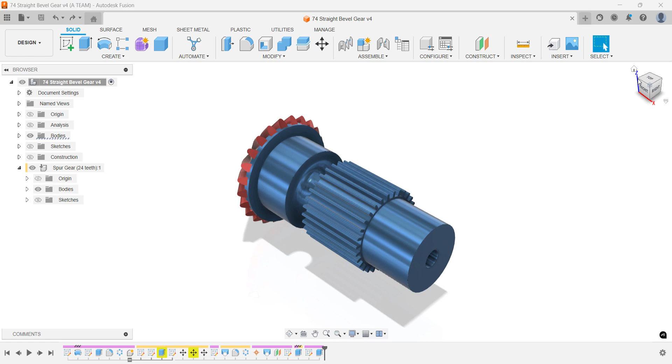In this Fusion tutorial, we'll quickly model a straight bevel gear. Keyboard shortcuts appear in the bottom left corner throughout the tutorial.

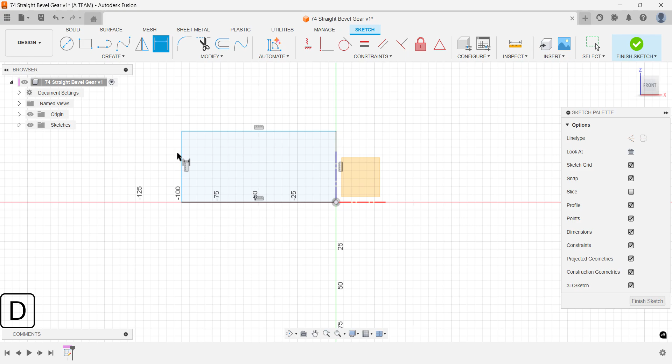Start your sketch on a vertical origin plane for a more intuitive workflow. This 2-point rectangle serves as a rough framework for the detailed sketching that comes next. Sketch loosely within its bounds, you can always refine it with dimensions later. Feel free to use my dimensions or set your own; the ones I'm using are just examples without any specific product requirements in mind when I recorded this.

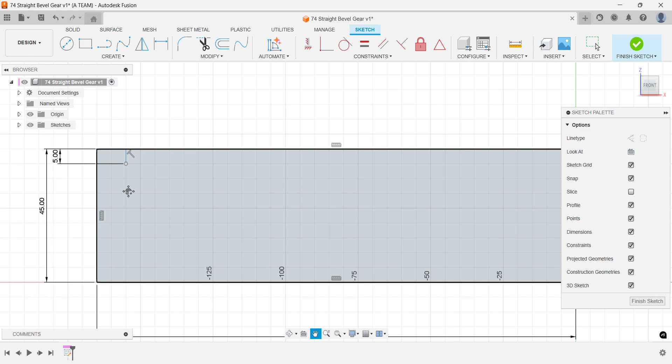The goal here is to create a shape we can revolve around an axis to form the shaft. Feel free to get creative—this sketch I'm showing is just one way to approach it. To keep things quick and simple, I'll start by laying down the sketch lines, then use dimensions to lock everything in place.

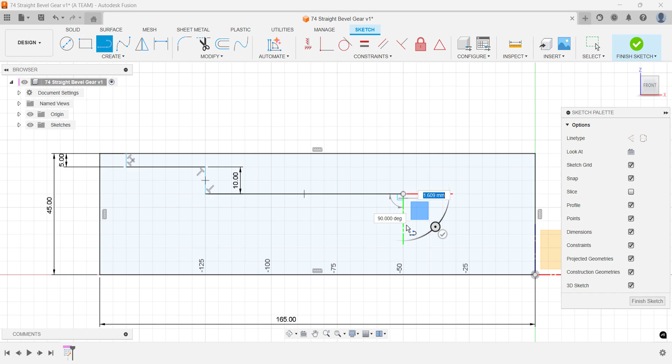Blue lines mean the sketch isn't fully constrained yet, while black lines are fully defined and behave more predictably. It's generally a good habit to fully constrain your sketches, especially later in the design process, but it's not always necessary early on when you're just roughing things out.

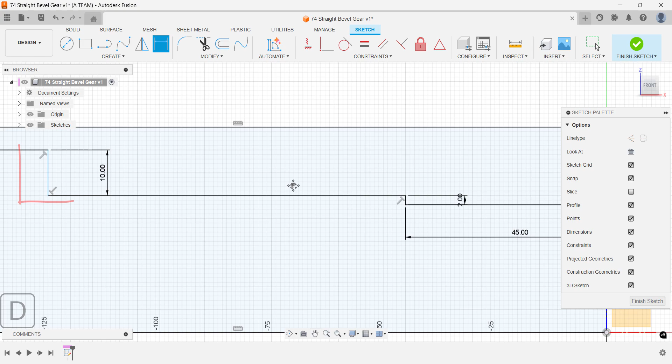Fusion helps you while sketching by automatically adding constraints. You'll see their symbols in the toolbar, and if you hover your mouse over any of them, you'll get a quick explanation of what they do.

To add some variation to the shaft, you can sketch an arc or any similar shape, then use dimensions and the trim tool to clean up any extra geometry.

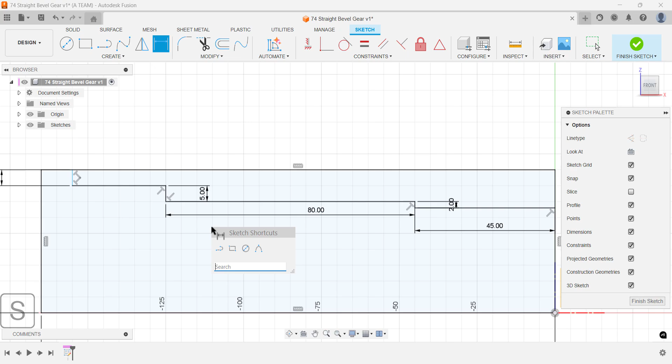Oversketching, iterating, and trimming is often faster than aiming for a perfect sketch right away. It also takes the pressure off. Modeling is about exploring ideas, not nailing it on the first try.

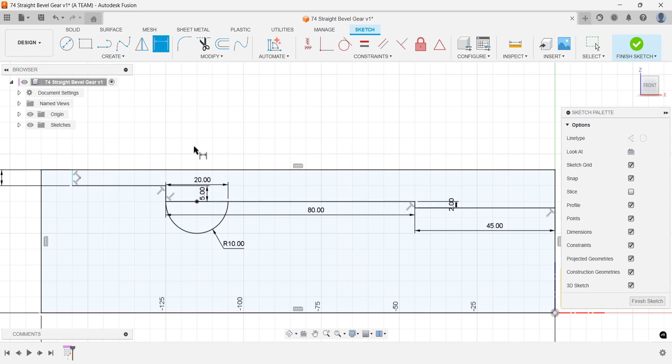Watch what happens to the defined black lines when we trim the sketch to fit the new arc. Some lines turn blue, and Fusion shows a warning in the bottom right corner: constraints were removed during the operation. This isn't a problem, but it's something to keep in mind.

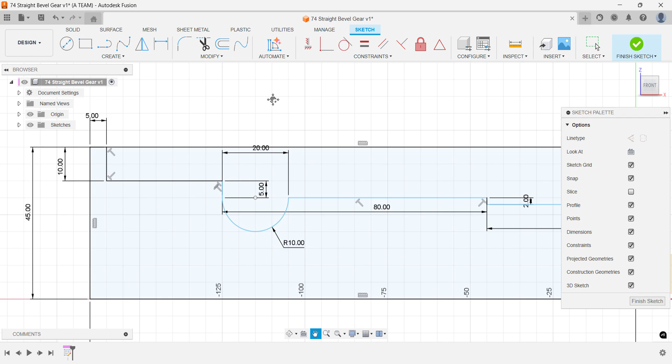Most lines still have dimensions, so it's a good mental exercise to figure out what's missing. In this case, adding a dimension between the end point of the sketch line and the origin fully defines the sketch.

At this point, you've got two closed profiles. You could revolve the lower one right away, but your model will be easier to work with if you first trim away the sketch lines you don't need.

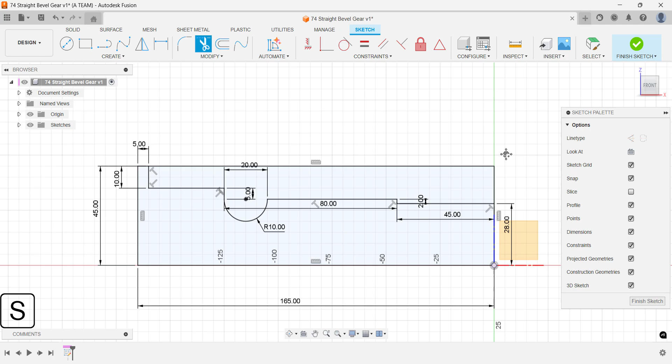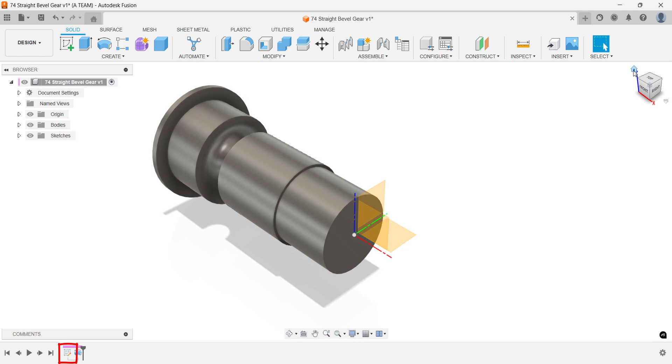Once trimmed, activate the Revolve command. Fusion automatically selects the remaining closed profile, so all you need to do is choose the axis. Click OK to complete the revolve. If you ever need to update the shape, just revisit the sketch through the timeline.

Before we move on to the head, let's add some details to the shaft. For better visibility, you can apply an appearance to the face we're about to sketch on. Think of it like a visual guide—it's not a construction line, but it helps. Use the same appearance you plan to use for the full body later; this blue shading makes it easier to see where you're sketching.

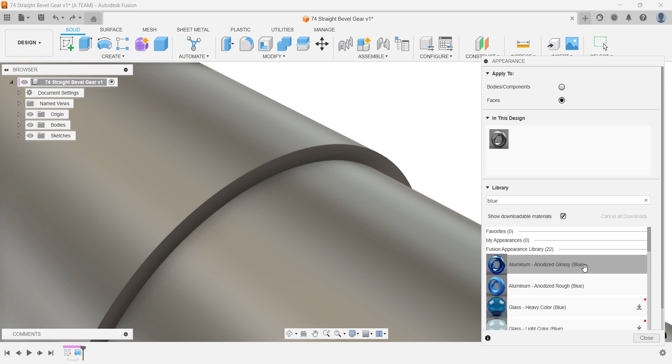Next, we'll project the underlying geometry to this new sketch. That way, if we ever update the original sketch, this new one will update automatically, keeping the design fully linked.

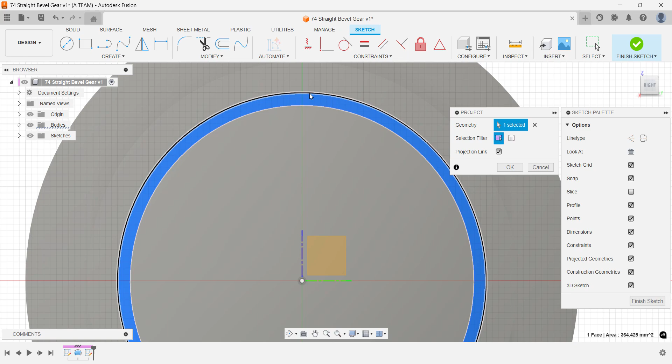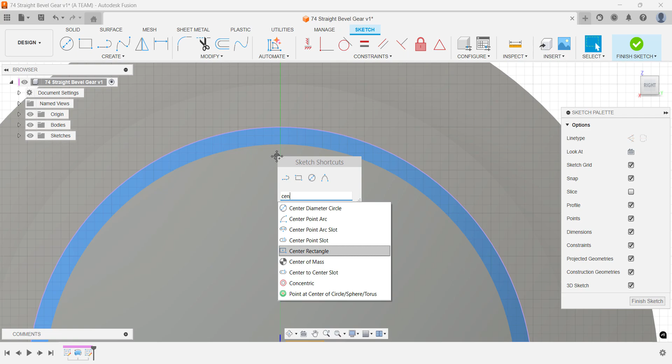There are plenty of ways to approach the detail we're about to create. Once again, I'm using a 3D modeling method where I sketch, trim, add, and remove geometry. The projected circular shapes act as boundaries for the trim operation, and the end of this rectangle blends nicely with the projected circle.

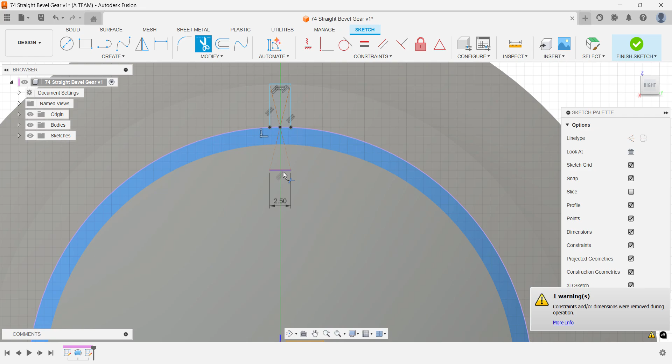Think ahead to the next steps. You'll need to create a circular pattern, and you'll want this feature to behave as a separate body so it doesn't affect the shaft. That's why I'm choosing to extrude it as a new body to the opposite end.

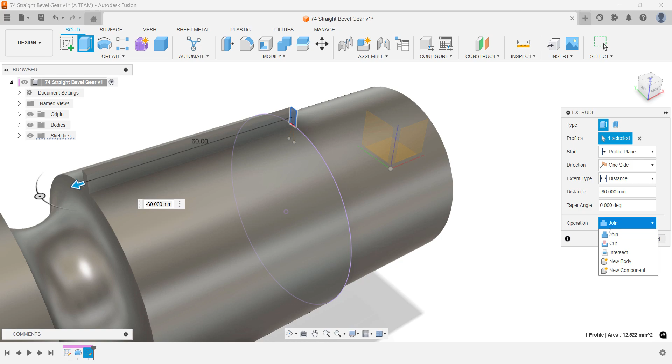And remember, this is just one approach. Others might prefer using commands like Loft or Rib to achieve a similar result.

Add a full round fillet before creating the circular pattern. Since it's parametric, it'll update automatically if the sketch changes. It's also easier to apply now than after the pattern, and any future changes to the pattern quantity will keep the fillet intact.

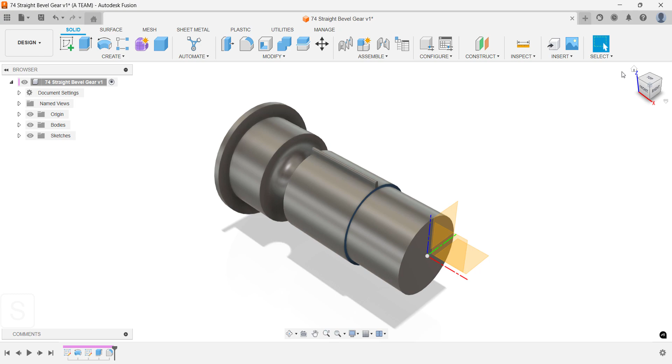The blue highlight confirms this part is an individual body. Keeping the design centered on the origin helps us easily choose an axis for the circular pattern.

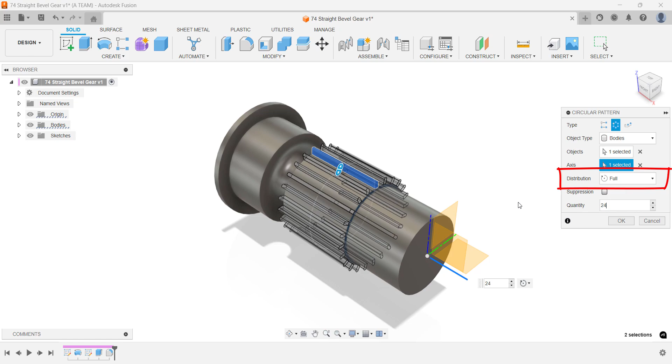Set the distribution to full and choose a quantity that fits your project. I'm using 24 here, but this is just an example, not tailored to any specific product requirements.

Now it's time to create the head. First, I'll measure the diameter—we need to check the size of the sketch we revolved earlier. It's 90 millimeters, so we'll keep that in mind when creating the gear.

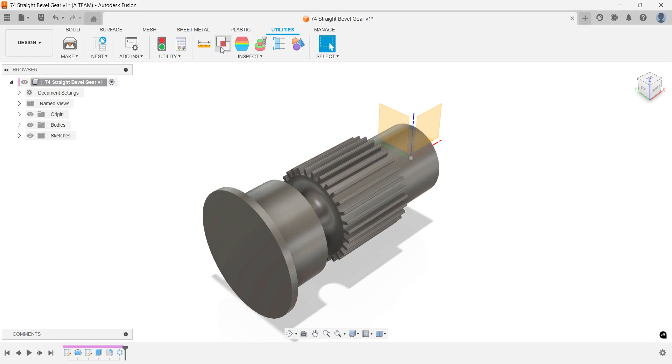Head over to the Utilities tab and open Scripts and Add-ins. Select Spur Gear and click Run. You'll see a helpful picture and a few settings in the menu.

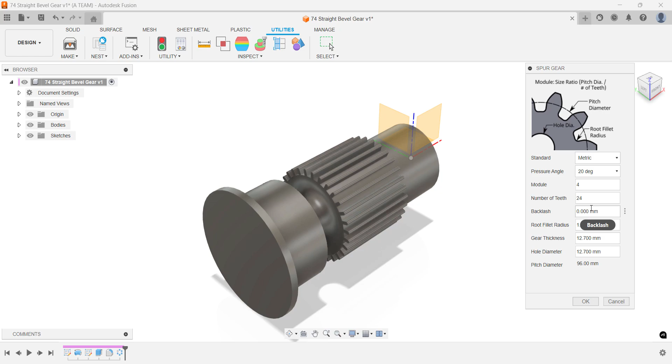Change the module to 4. This updates the pitch diameter to 96 millimeters. For a real project, you'd probably fine-tune these settings more carefully, but this will work for this Fusion tutorial. Hit OK, and the new Spur Gear component will appear centered at the origin and in the project browser.

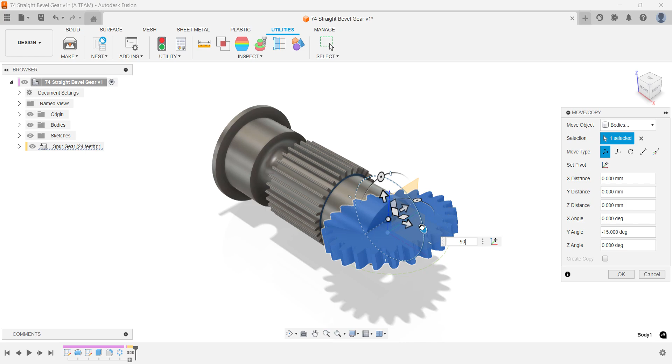Reposition your gear using the Move command. If you followed the first rule of Fusion and placed your design in a new component, you could assemble everything. But we're not doing that here.

Don't use joints here. They are the right tool in many cases, but not in this one. We're about to break the gear into parts and not making an assembly.

Use the point-to-point move instead. It makes it easy to place the gear exactly where it belongs.

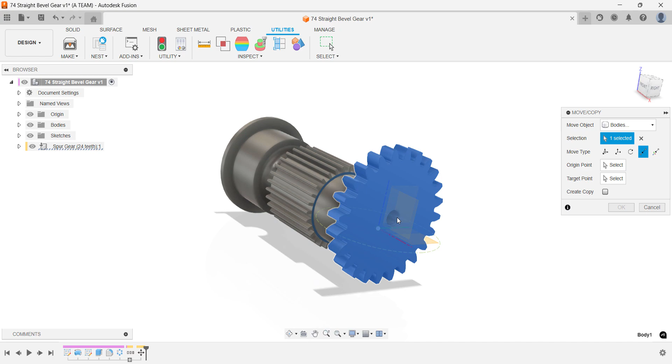Pay attention to the origin point and target point—make sure you get them right. As usual, Fusion helps you snap to geometric centers, which makes positioning much easier and smoother.

Do a quick quality check from different angles using the view cube to make sure everything aligns before we move on.

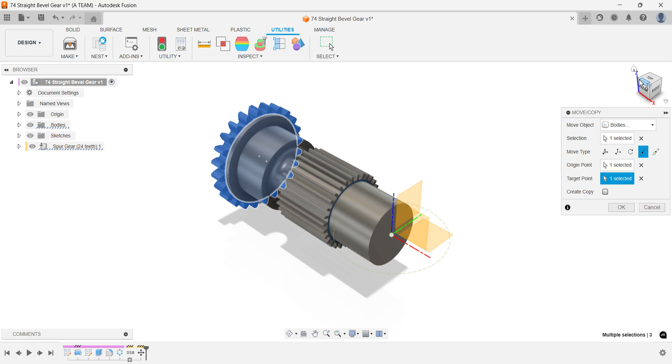Click the small plus sign below the Spur Gear in the timeline to expand all the actions it includes. Delete the pattern, we only need one tooth.

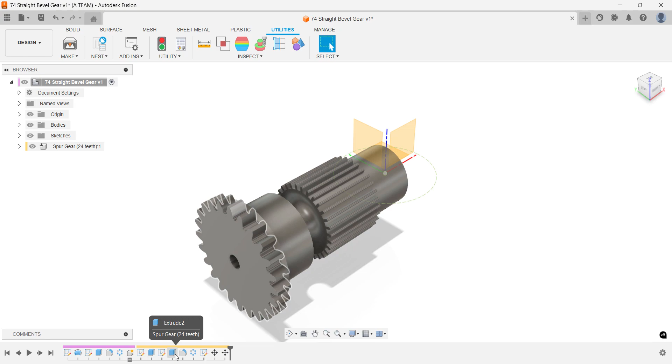Then delete the solid base. We don't need it for what comes next.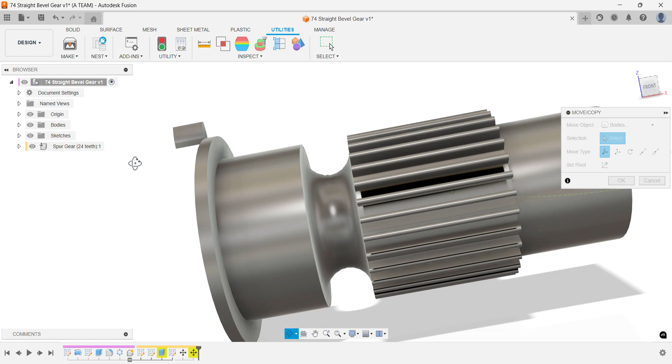There's more than one way to solve this. We're using the Spur Gear add-in and then deleting parts of the gear. Not because we can't model a tooth from scratch, but because the add-in is quick, easy, and packed with standardized settings. If you prefer to model your own tooth, go for it. That works too.

If you set a new pivot point but nothing happens when you try to move your body, you probably forgot to confirm the new pivot.

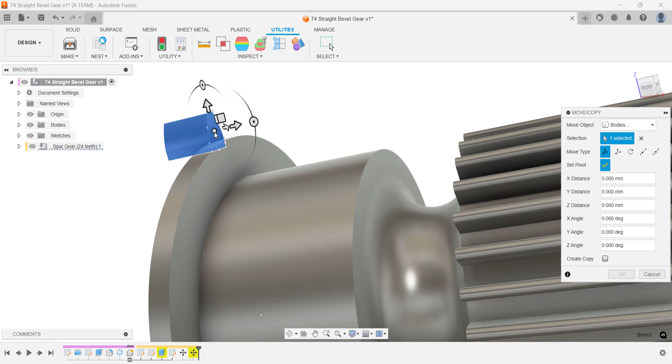Once it's confirmed, you can finish the Move command and zoom out a bit to get a better view of your setup.

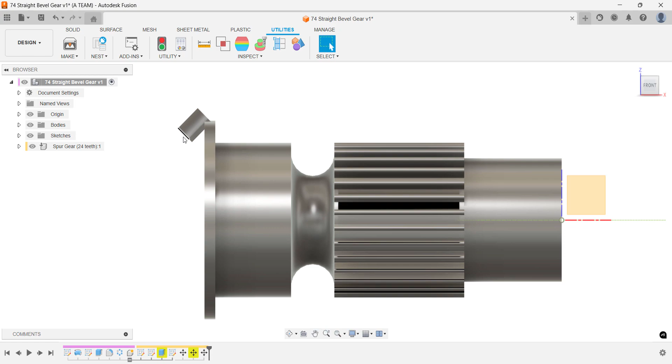Next, we'll create a 3D sketch. It's simple and it serves as a framework for the next steps in the workflow.

Choose the vertical construction plane as your sketch plane to keep everything centered.

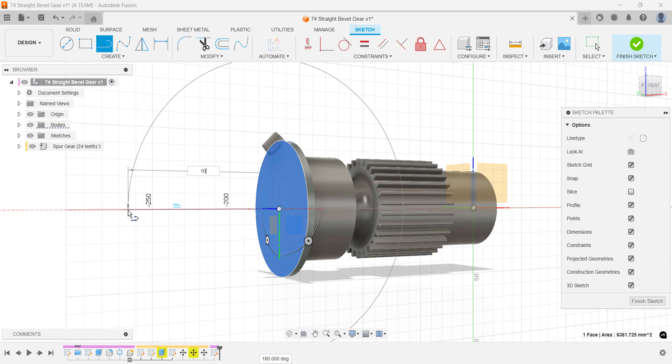Orbit into position and snap your first line to the center of the shaft. The length isn't important, oversketch it to move faster. Then turn this line into a construction line since it's just a guide.

Next, snap your second line to the center of the tooth and draw it downward at a 135-degree angle.

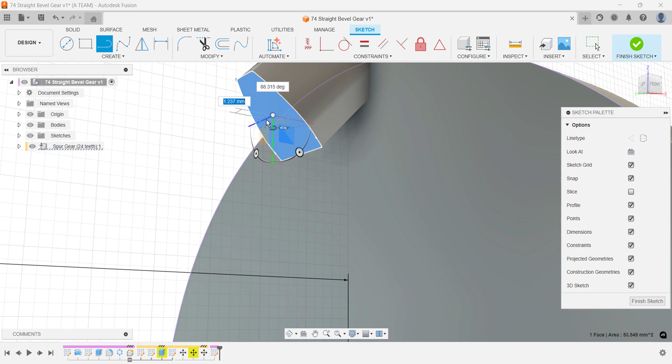That's simply 180 minus 45. It gives us the correct slope while pointing the line in the right direction. Let it cross the first line. Trim away the excess from both construction lines and finish the sketch.

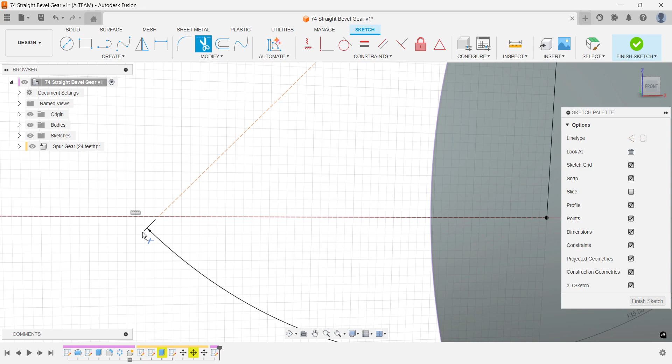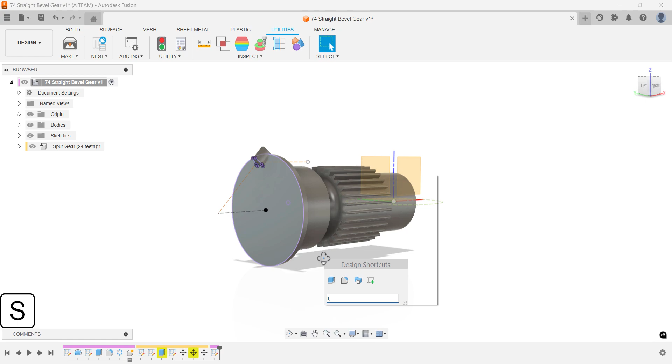Now that we know what to loft and have a guiding profile for both angle and length, it's time to use the solid loft command. You'll recognize it by the blue color. It's used for lofting solid bodies, which fits this workflow.

Start by selecting the end face of the tooth as your first profile. Then choose the point where the two construction lines cross as your second profile. Before you confirm, don't set it to a join operation right away.

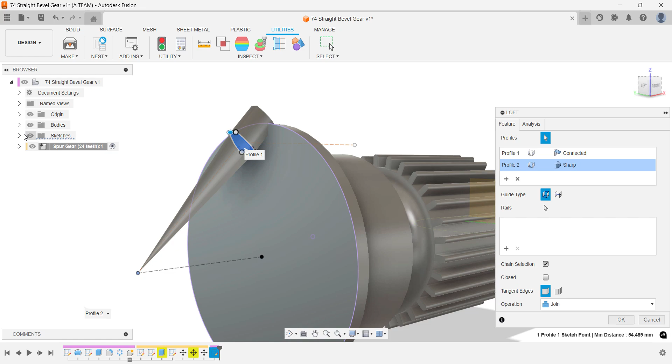You want the loft to connect only to the tooth, not the entire shaft. To play it safe, turn off the visibility of the shaft before you confirm the join operation type. Once that's done, things should look good.

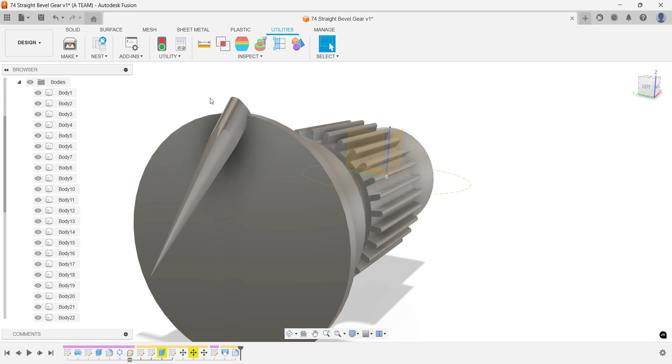This is also a great time to make any other small adjustments before moving on to create the pattern. If needed, use the full round fillet. It's easy to apply and fully parametric, so it will automatically adapt to any future changes in your geometry.

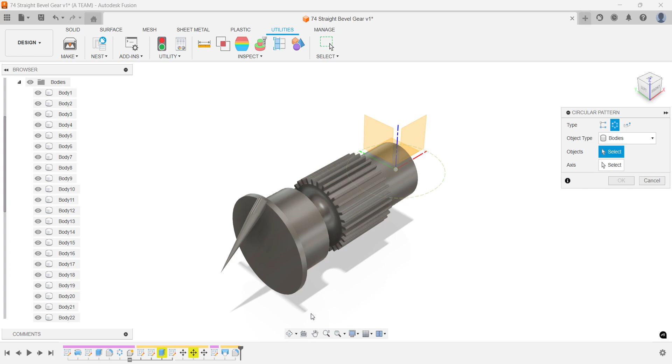Create a circular pattern using the feature you just made. Select the center axis so the pattern rotates around the origo. Make sure distribution type is set to full. This ensures it goes a complete 360 degrees.

Once the pattern is in place, you'll see everything lines up nicely thanks to the center design. But there's an empty space behind the pattern. We'll fix that next.

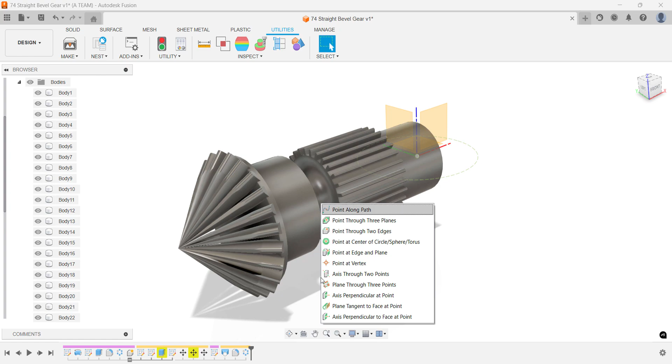Place a point at vertex where the pattern ends. This is also a good time to save your project if you haven't done so in a while.

Use the loft command from the solid modeling tools to loft the circular profile up to the point you just placed.

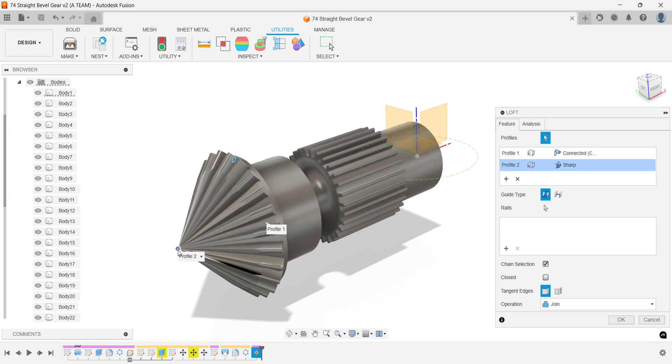I kept the operation set to join, but since we're not focusing on organizing components or bodies in this tutorial, you could choose another operation if it suits your workflow.

Next, create a section analysis for a quick quality check. If the cut ends up on the wrong side, just hit the flip button. This tool makes it easy to inspect the inside of your model and catch any issues early.

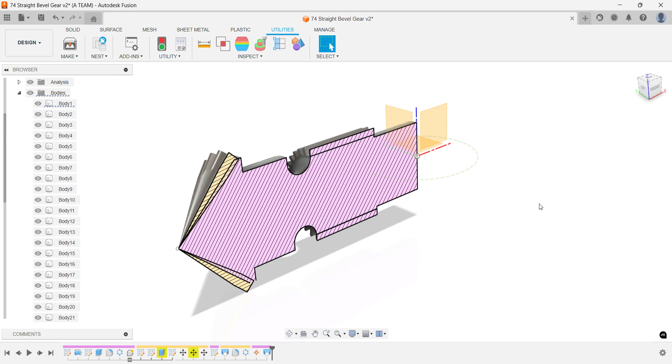Let's flatten the top before cutting a hole through the model. In this example, I'm placing a construction plane just in front of the model to use as the base for the next step.

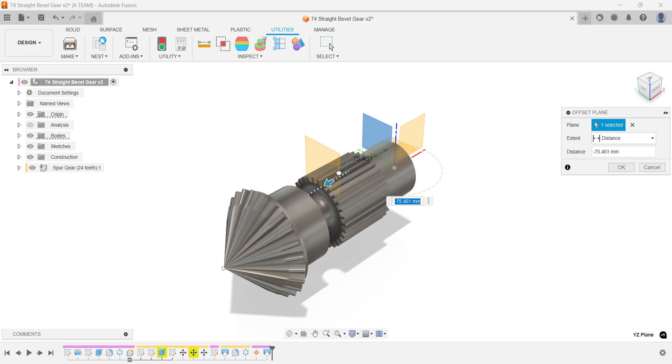If you want a more advanced and future-proof workflow, you'd create a sketch plane that adjusts automatically when the 3D model changes. That takes a bit more setup but offers better parametric control.

With the sketch plane ready, draw a center rectangle and use Extrude Cut to remove the unwanted top section. I went with this quicker method because it's simple and gets the job done fast, but if you're designing something that needs to adapt over time, the parametric route is more robust.

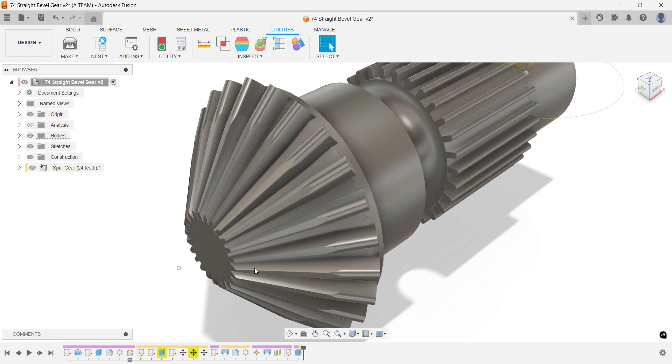This flat surface makes a perfect base for the circular sketch. It's a quick and simple sketch, but it's worth noting that while outside the scope of this tutorial, you can take it further. If you want your sketch to stay linked to other features during future changes, there are ways to make that relationship more robust.

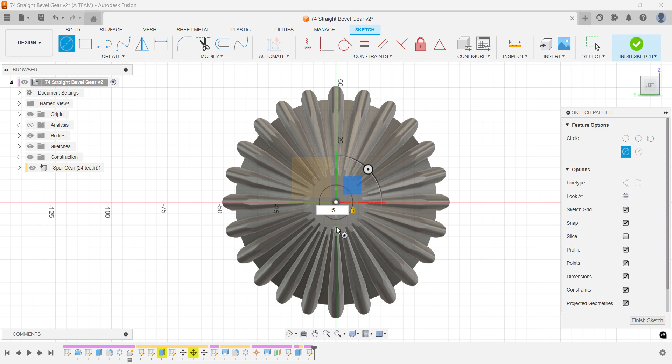Now use Extrude Cut to go through the entire model. This method is both simple and reliable, and it's better than setting a fixed distance, because you're linking the cut directly to the model's geometry, which keeps things more stable if the design evolves.

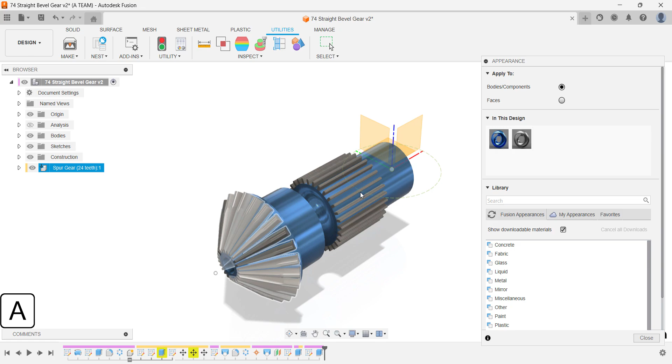And that's it for this tutorial, where we focused on building a quick concept for a straight bevel gear. I prioritized speed over proper model management and didn't organize the design into components, which does come with trade-offs. For example, adding appearances at the end gets a little messy.